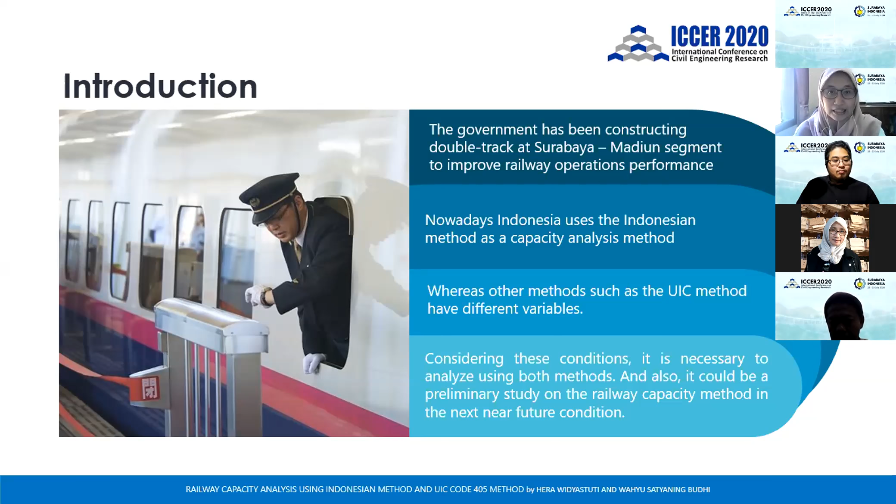So considering this condition, it is necessary to analyze using both methods, and also it could be a preliminary study on railway capacity methods in the near future, especially for the analytical method. So this is the objective of our study. The length of this segment is around 152 kilometers and consists of 23 stations, starting from Surabaya Gubeng station to Madiun station.

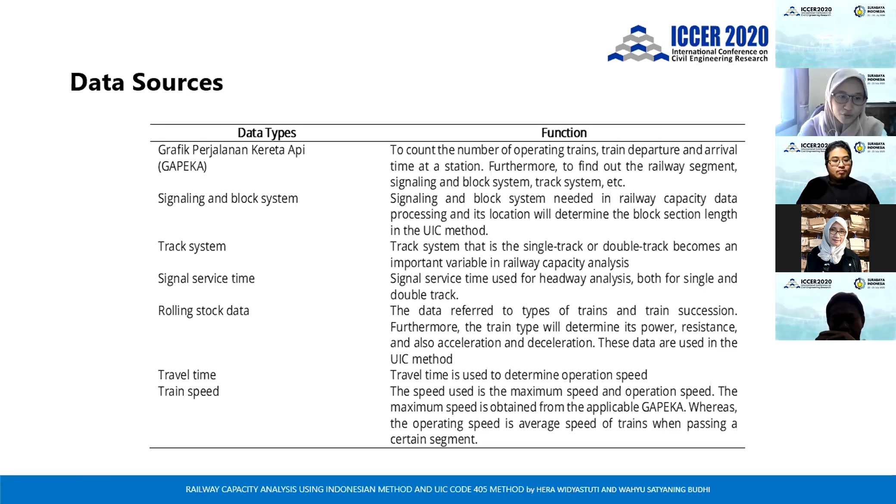So this is the data source, and the data used in this study is only secondary data. This secondary data was obtained from related institutions, including PT KAI, DAOP or Daerah Operasional 8 Surabaya and DAOP 7 Madiun. The detailed data can be seen in this table. There are GAPEKA, signaling and block system, track system, signal service time, rolling stock data, travel time, and train speed.

So in this study, theoretical and practical capacity analysis is carried out. Theoretical capacity is the number of operating trains during a certain time interval using maximum speed, and practical capacity is the actual traffic volume condition, which is calculated using realistic assumptions. There are cross and overtake situations.

So this is the first method that we use in our study. This is the Indonesian method. There are several variables. The first is total time, average headway, and the multiplier factor after deducting the time factor for maintenance due to the operating pattern of train travel. For a single track it is 60% and for double track it is 70%.

And the next variable is travel time on the track section. And other variables are travel time from the outer signal to the station, and signal and block service time. Equation 1 is a formulation that applies to a single track system, equation 2 is a formulation used for the double track system, while equation 3 is the headway calculation.

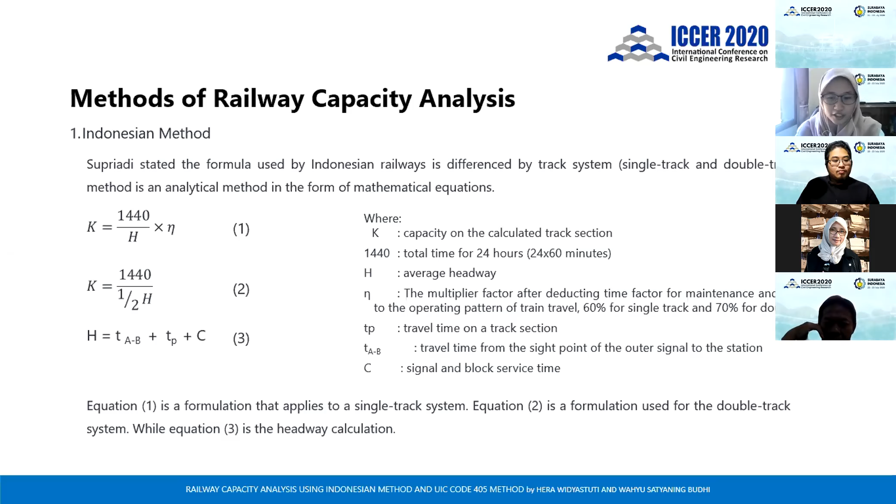The second method of our study is the UIC Code 405 method. There are variables: reference time, average minimum headway, additional time due to maintenance difference by its utilization, normal operation, and the applicable during peak hours. The next variable is additional time based on the number of intermediate blocks. Same as the Indonesian method, this method also requires headway to analyze railway capacity.

At single track system, headway will be affected by travel time, acceleration and deceleration times, and signal service time. Whereas in the double track system, the headway will be affected by block length, train length, signal service time, and also the speed.

So for the result and discussion, the analysis was performed on the existing condition with two assumptions: full single track condition which reflects GAPEKA 2017, and 50% double track condition which reflects GAPEKA 2019.

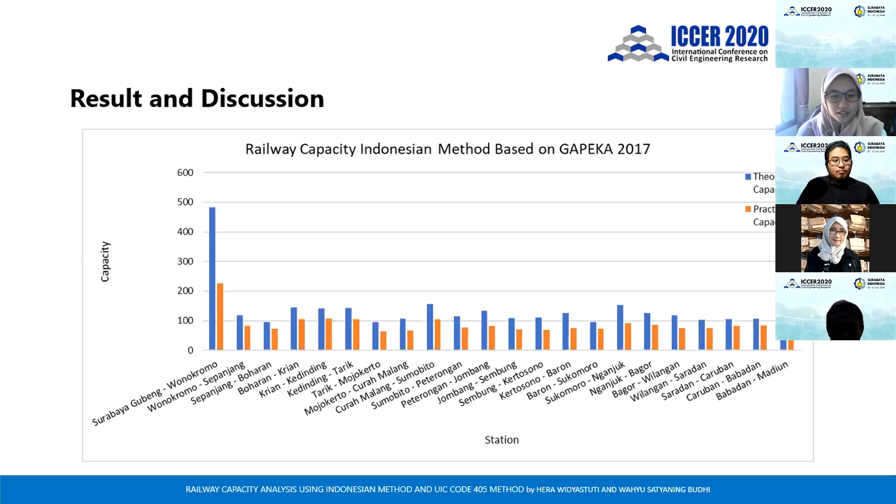This is the graph of railway capacity using the Indonesian method based on GAPEKA 2017. We can see that the largest capacity is located in the Surabaya Gubeng Wonokromo segment, and the average practical capacity for the Indonesian method is 89 trains per day.

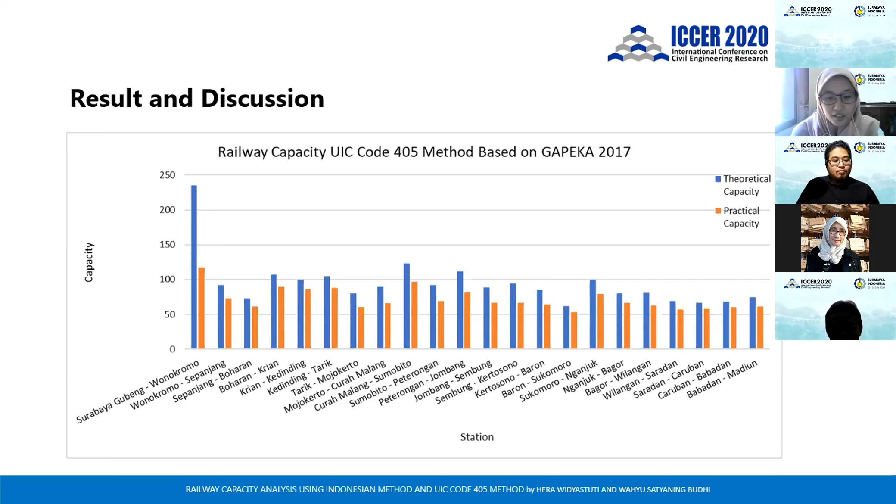This is the result of railway capacity analysis using the UIC code based on GAPEKA 2017. The largest capacity of this method is also located in the Surabaya Gubeng Wonokromo segment, and the average practical capacity is 73 trains per day.

The next is the second assumption with 50% double track, using the Indonesian method and based on GAPEKA 2019. The largest capacity is located in the Sukomoro Nganjuk Station segment, with the average practical capacity of 159 trains per day.

This is the result of railway capacity analysis using the UIC code based on GAPEKA 2019. There is also the largest capacity located in the Sukomoro Nganjuk Station segment, and the average practical capacity is 96 trains per day for the UIC code method.

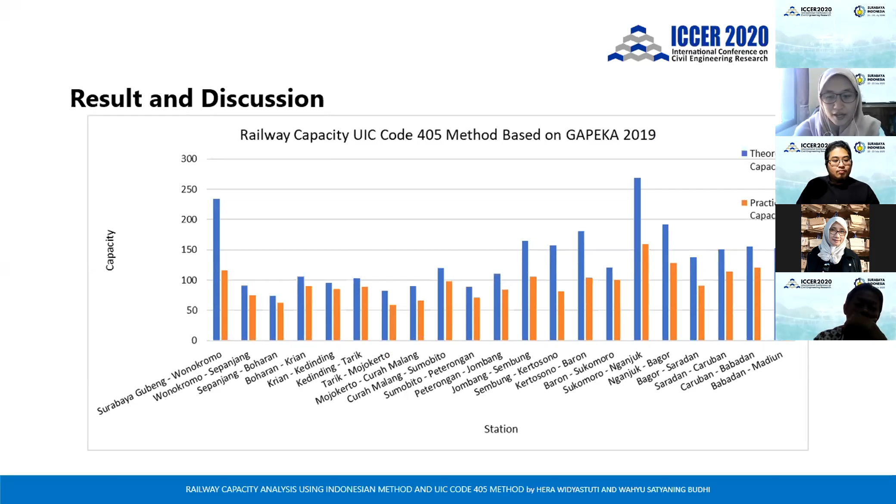Based on this graph, it can be known that there is a railway capacity increment in Jombang Madiun. This increment is due to the double track operation, and it's also caused by the replacement of the signaling block system. Moreover, it is affected by the Wilangan station that turns into an intermediate block.

So this is the conclusion. First, the result of railway capacity analysis using these two methods indicates an improvement in railway capacity because of double track construction in the Surabaya-Madiun segment. One of the different variables is additional time due to maintenance, which is different based on utilization.

Its utilization in the UIC method is different based on its operational condition, by peak and non-peak hours or normal. That may also affect the result.

Time is up. Can you go a bit faster, please?

Oh yes, ma'am. This study implies that the UIC method could be a relevant comparison method to the existing condition. However, it could be used as a preliminary study recommendation for policymakers to analyze capacity in the near future. Furthermore, regardless of which method will be applied in the near future, safety must be considered more.

And that's all. This is the end of our presentation.

This is basically the reason why our construction practice is not really considered eco-friendly, and therefore we need new technologies to make sure our practice is more sustainable and more environmentally friendly.

One approach is to perform warm mix asphalt, which is basically the normal mix but produced at a lower temperature, 100 to 140 degrees Celsius.

Several benefits are reduced fuel consumption, reduced energy consumption, and also better health exposure for the worker because of less heat and less carbon dioxide emission. We also have a longer window of compaction, so we can compact more in a day.

It's beneficial for us, but the performance of both types, warm mix and hot mix, remains our major concern. We still have cracking, problems with moisture damage, rutting, and permanent deformation.

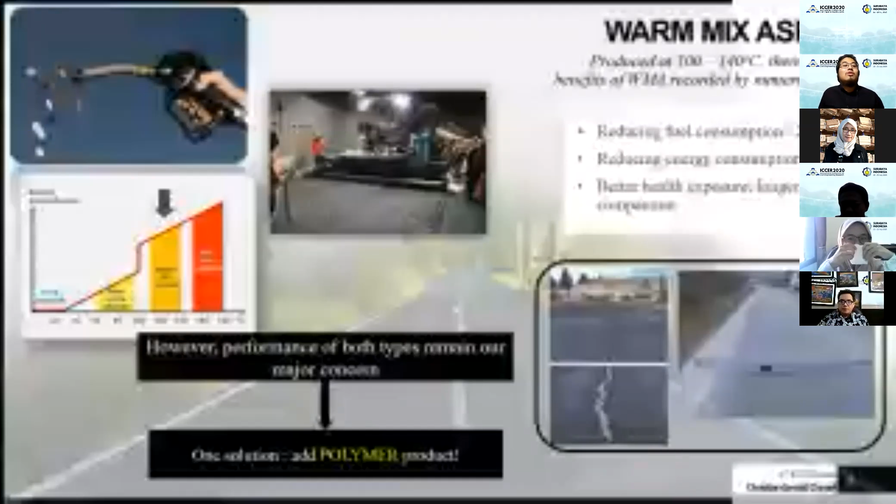One of the solutions, there are many for sure, is adding polymer to our asphalt. Among the most popular types of polymer, we have aramid, polyolefin, and PET. I will explain all of them now.

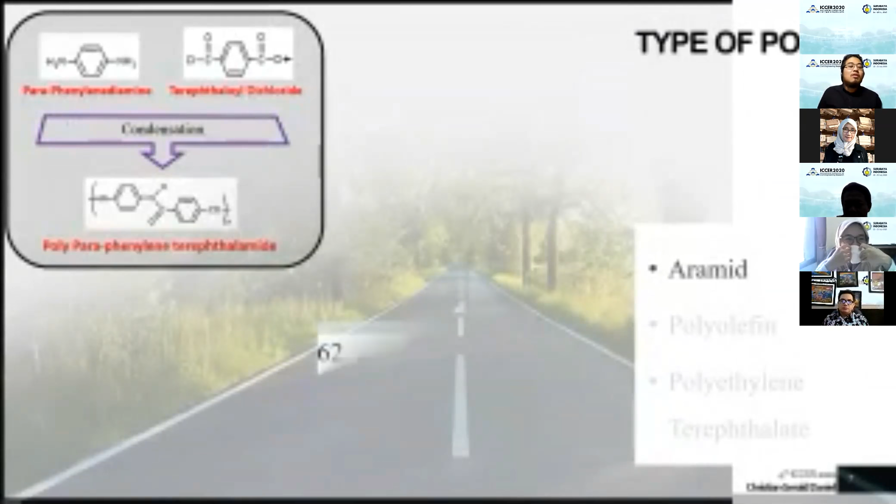For aramid, it's a result of a condensation process from two monomers. We can trace it back to the 1930s until now, under the brand Kevlar, the most notable one. These are several of its mechanical properties: it's insensitive to temperature, meaning it can really work in extreme temperatures, more than 200 degrees, for instance.

Moving to polyolefin, it's basically the normal plastic product that we use. We have polyethylene and polypropylene as branches of polyolefin. Within polyethylene itself, PE, we have high density, HDPE, and low density, LDPE. We can trace it back to the 19th century until now, and these are the characteristics of both LDPE, PE, and PP polymer.

The last one is PET. While it doesn't necessarily belong to the class of polyolefin, it shares the same monomer, ethylene glycol. That's why, and because it's also a really popular product we use nowadays, I include it within this paper.

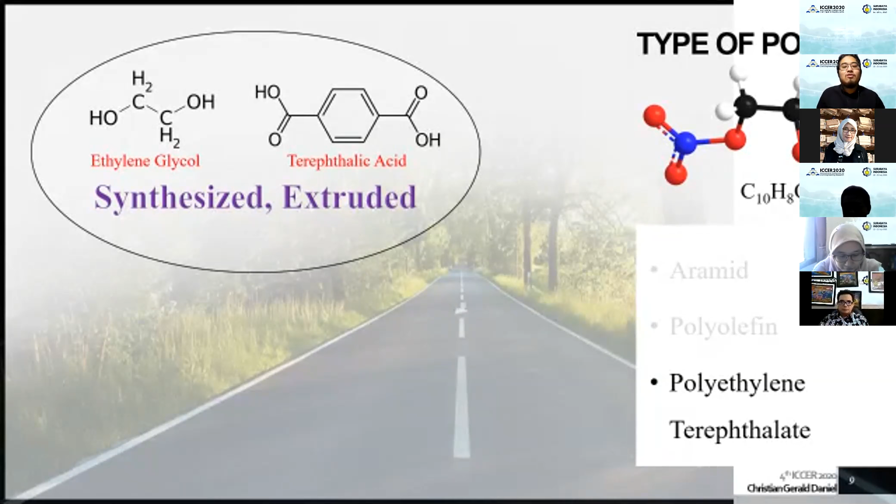We might know it with another name, not only PET but polyester. But the term polyester is mainly used in fashion products, whereas other industries use the term PET, or polyethylene terephthalate. These are its mechanical properties. And how do we include them within our mixture? We have wet and dry methods.

With the wet method, basically we create polymer modified bitumen, or PMB, whereas using the dry method, we could create either fiber reinforced mixture, or we could substitute the aggregate partially.

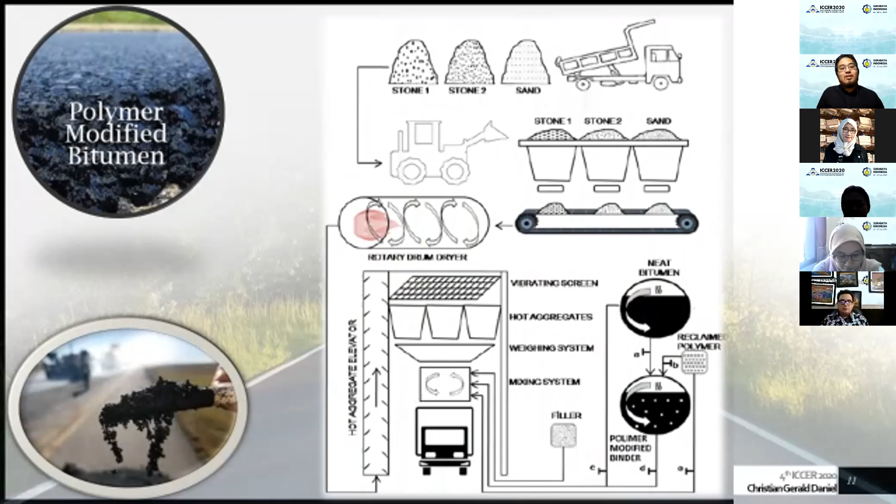This is the schematic. For the wet method, basically we have A, B, and D, which means that the neat bitumen will be mixed with reclaimed polymer, and then the modified bitumen will be mixed with aggregate. Whereas with the dry method, both are mixed simultaneously, so the bitumen isn't mixed with polymer first. The question is, what are the effects of both methods?

Let's dive into the wet method first. Using polyethylene and polypropylene, we can see that the penetration is decreased by more than 60%, or around 60%, by PE and PP respectively. Both indicate quite similar performance. Also with the softening point, PE modified bitumen is maybe more beneficial, but it's just a slight improvement, more than 50 and 40 to 50%.

And the effect of both modifications lasts up to only around 7% in both cases, beyond which the effect starts to deteriorate. You cannot really see the improvement anymore.

One thing to be taken into account is a phenomenon like this, polymer binder separation. The highlighted part is the polymer. It cannot disperse entirely inside our binder or bitumen because of the differences in density, and they don't have a really strong bonding, chemical bonding. That's why this could happen, and that's why we need to stir it constantly. It's not thermodynamically stable, but it is kinetically stable if we stir it constantly.

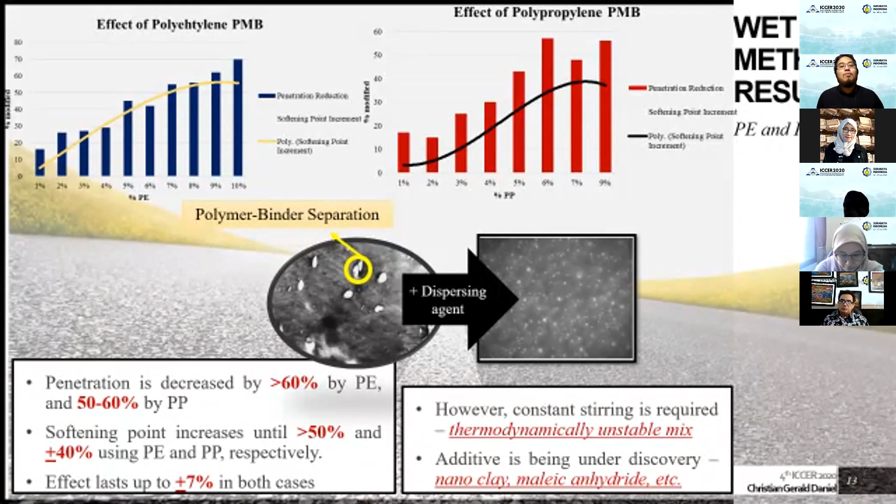To combat this, we have some additives such as nano clay, maleic anhydride, which is a polymer also, etc. But it's still not an affordable method, which is why the price of the PMB product is quite significantly higher than the other peers.

What about PET? Basically, they are the same also with stiffness and more tensile strength, reduced permanent deformation, and the effect lasts until 6%. So it's quite the same, 6 and 7%, within PET, PE, or PP as well. One more thing is there is an increase of moisture susceptibility for all the polymers, which indicates more risk of moisture damage.

What about the dry method now? I haven't mentioned aramid yet because it has a high melting temperature, which means it cannot just melt inside the bitumen using the wet method. So it reacts more as a mechanical reinforcement using the dry method.

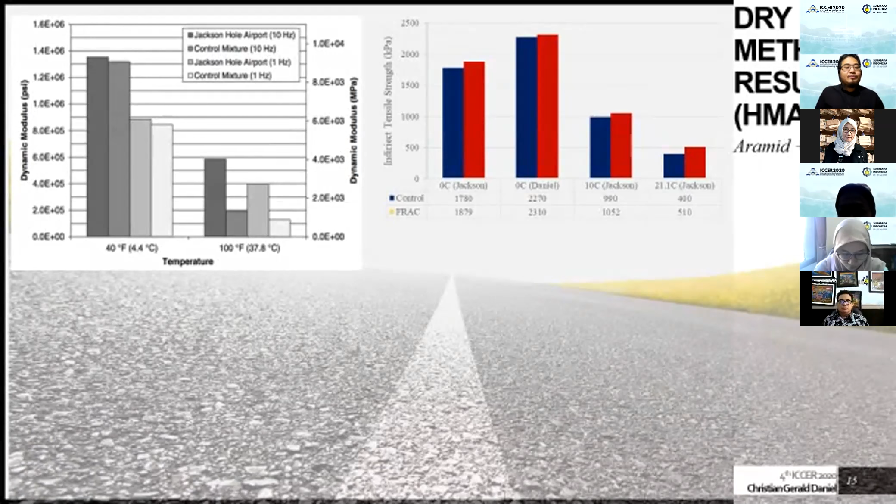By combining aramid and polyolefin, we could have something like this: stiffness and strength basically increase. The effect is more obvious at high frequency loading, indicating better performance maybe at high traffic. It is also more apparent at high temperature, where the bitumen becomes less viscous, so the fiber could react better than in the previous stage.

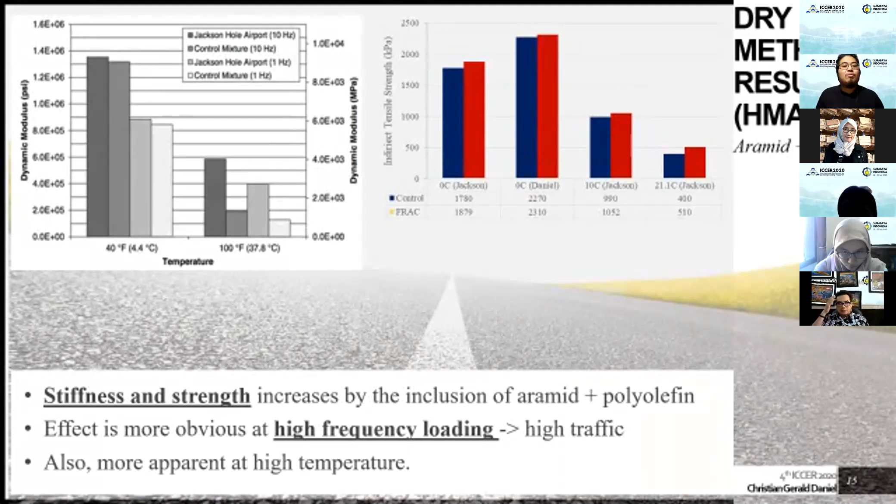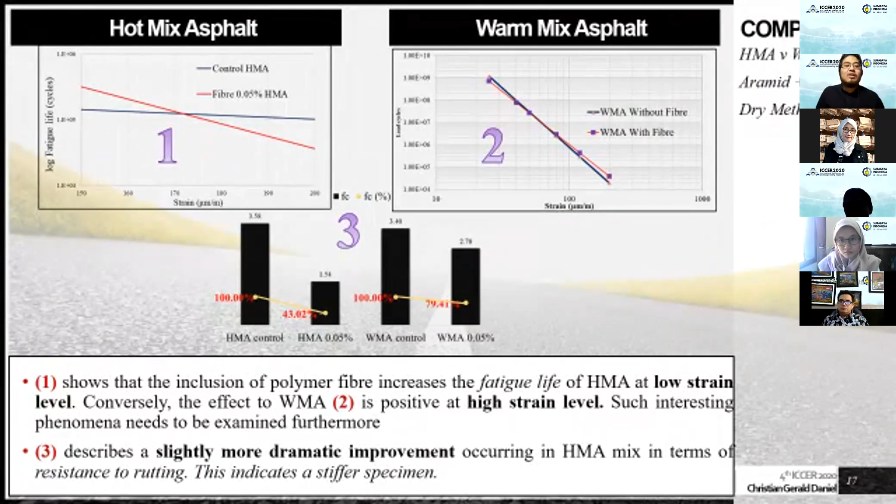If we try to compare the performance of reclaimed asphalt pavement, RAP, in hot mix and warm mix, the result is in contrast. You can see that the fatigue life of the mixture is increasing at high strain level for warm mix, whereas it was in contrast within the RAP hot mix asphalt.

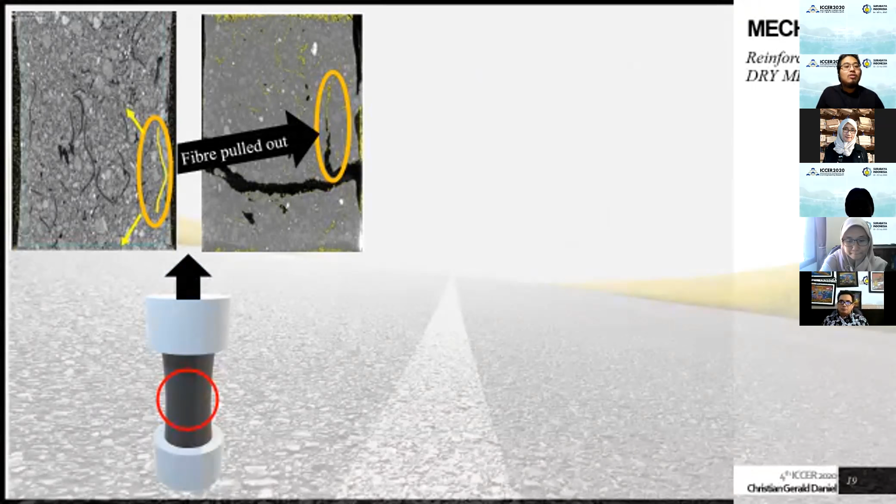This is the result of PET within the dry method. The more interesting part is the mechanism. Within the dry method, when we try to pull the sample and zoom in, we can see the fiber being pulled out, which means there is an interaction that is both temperature and frequency of load dependent. There is an interface bonding, both mechanical and chemical, between the fiber and the bitumen matrix. There is also load transfer thanks to the network of fibers between the fiber-matrix interface and another fiber. So those are basically the reinforcing mechanisms.

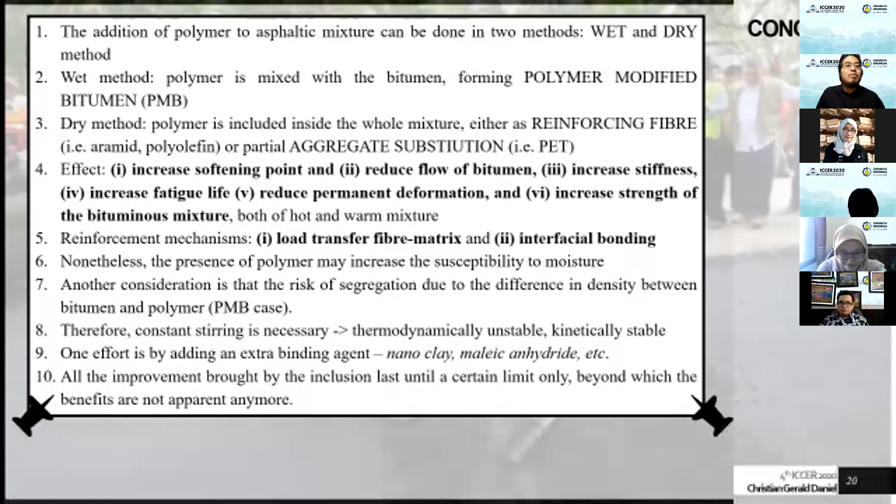These are the conclusions. With the wet method, we have polymer modified bitumen. With the dry method, we could have reinforcing fiber or partial aggregate substitution. The effects are to increase softening point, reduce flow of the bitumen, increase stiffness, fatigue life, and strength, and reduce rutting, basically an increase of stiffness in both hot and warm mixtures.

There is a risk of segregation in the PMB case due to the difference in density and the weak bonding between bitumen and polymer, therefore constant stirring is necessary, and it's thermodynamically unstable but kinetically stable. And also we could have binding agents or additives. And the most highlighted point is that the benefit lasts only until a certain limit, as we have seen, beyond which

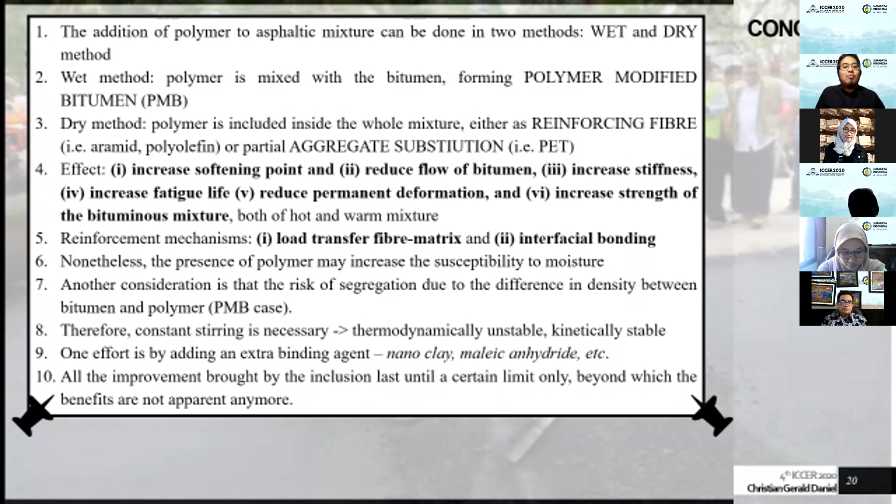Christian, time is up. Okay, is it quite many? Okay, great. Okay, sorry about that. It's okay. I'm done. Okay. So just

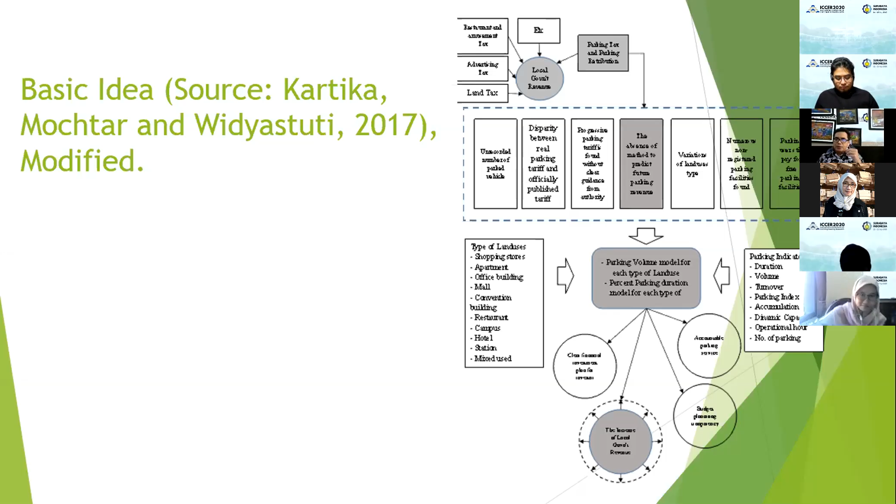So basically, we need to collect information regarding the volume and also the duration of the parked vehicles, because when we are applying the progressive tariff, we need the duration in order to get the tariff proportionally. This is the background of the study.

Firstly, there is a lack of methods for calculating parking, and also the absence of a system to estimate the potential parking revenue. Due to this, I can identify the factors that influence the potential parking revenue. The first is the real number of parked vehicles is not yet recorded entirely. Not all parking facilities in Surabaya are recorded; many are not registered yet.

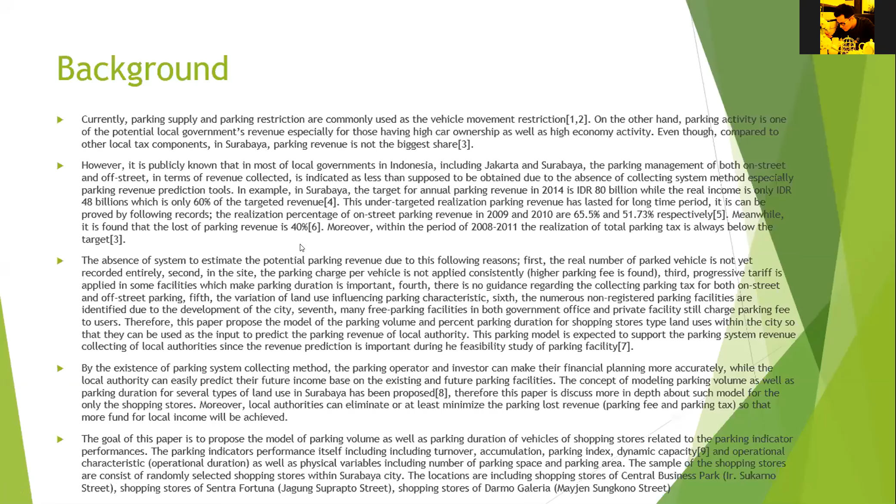Second, on site, the parking charge of vehicles is not applied consistently. In fact we experience the progressive tariff applied, while according to the regulation in Surabaya or many cities in Indonesia, there is no parking charge for the progressive tariff. So this is potential revenue for the city actually.

Third, the progressive tariff is applied in some facilities, which makes parking duration important. Fourth, there is no guidance regarding collecting parking tax for both on-street and off-street parking. Fifth is the variation of land use influencing the parking characteristics, because malls, hospitals, and education facilities will produce different parking characteristics.

Six, numbers of non-registered parking facilities are identified due to the development of the city. Seven, many free parking facilities in both government offices and private facilities still charge parking fees to all users. This can be found when we enter a parking facility that should be free, but in fact we still pay. This is beyond the supervision of the parking authorities.

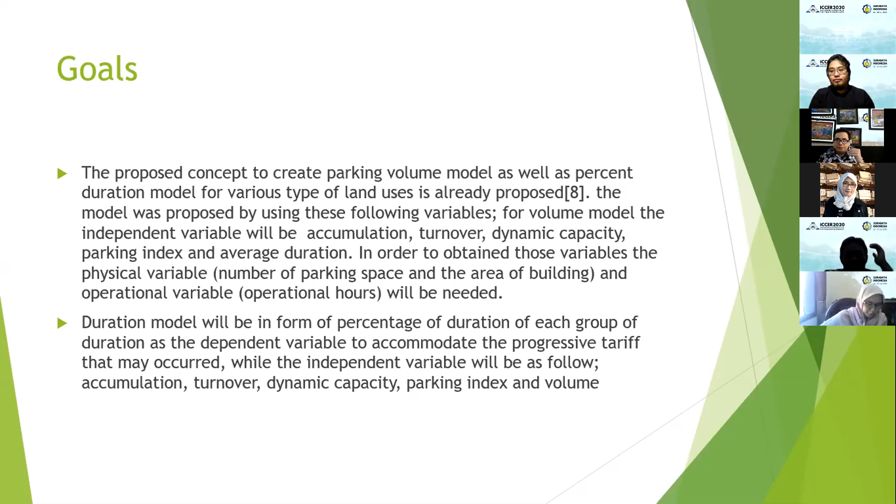And then we are doing the regression test. Your time only lasts 3 minutes, so okay, would you please be faster?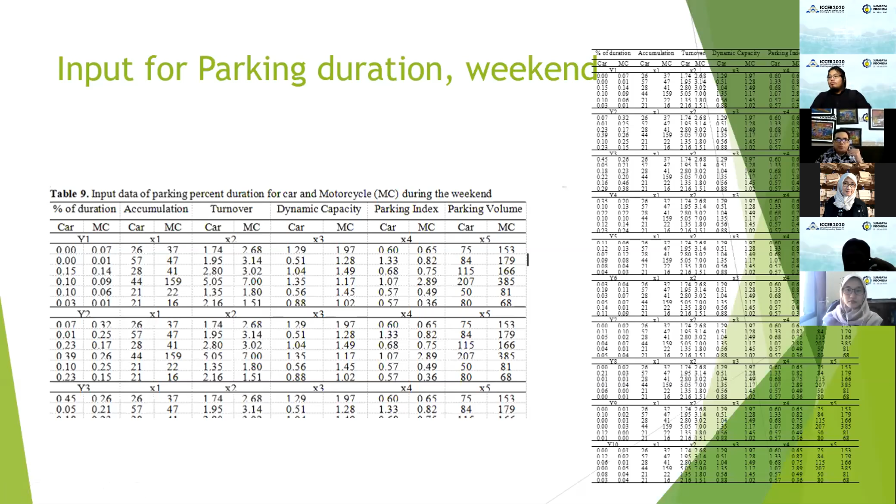And then this one is input for parking duration; it's a little bit messy here. Okay, this one is zoomed. So this is also divided into two types of vehicle, in this case car and motorcycle, and also divided into 2 types of days, which is weekday and weekend.

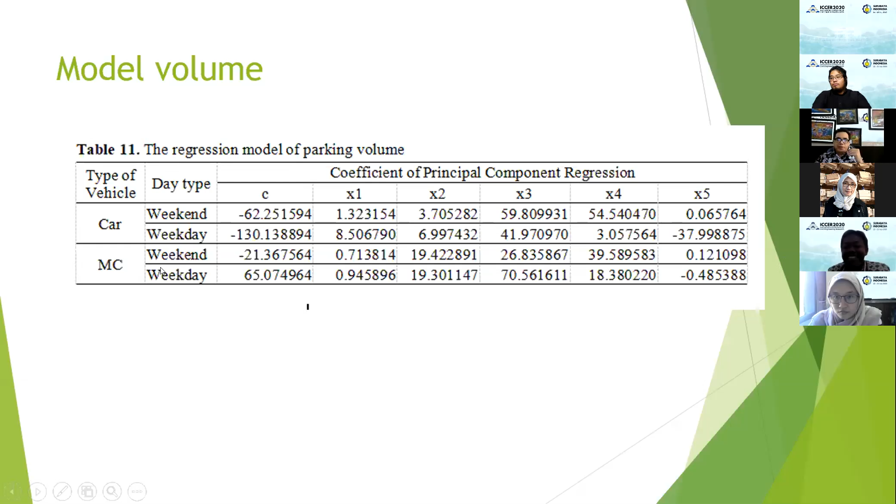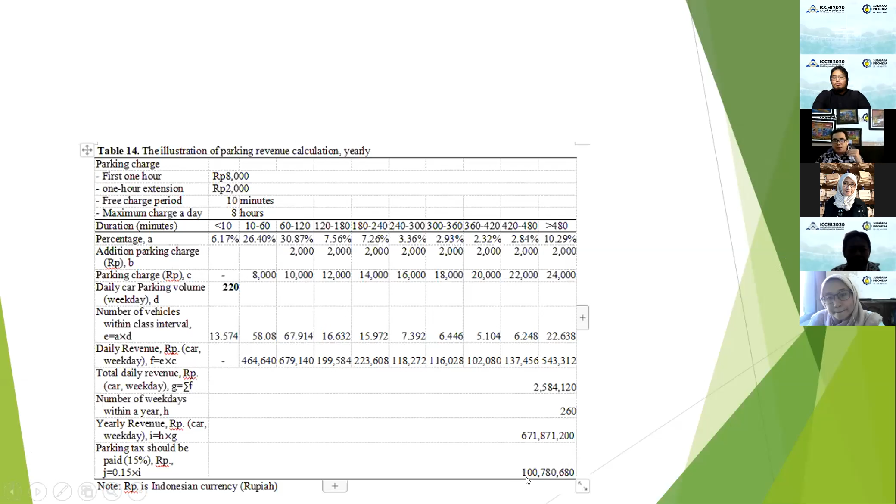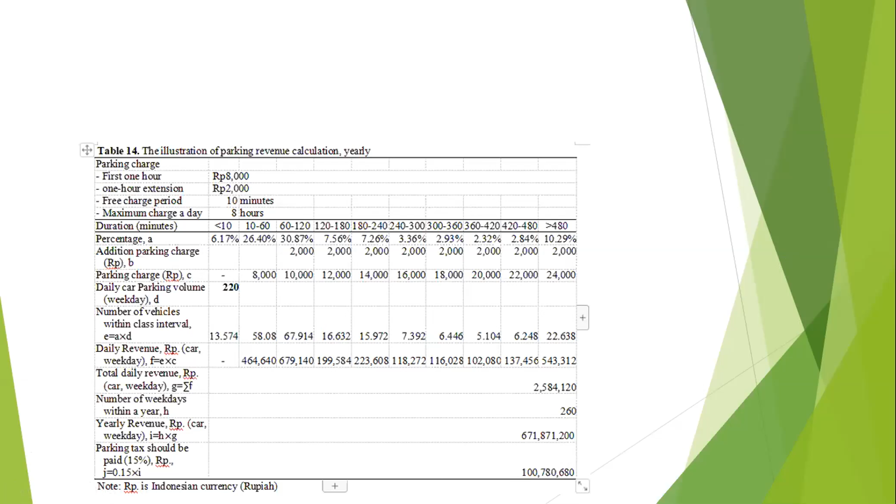Okay, this is the illustration for the utilization of the model. Suppose we have 220 vehicles. So the tax that must be paid to the government in a year will cover 100 million. This is only for car and only for weekdays. So we can calculate for weekend and other vehicles. Thank you.

Thank you, Kartika. And then would you please close your presentation paper, please? Yeah. And then now the fourth person is Romainur. Is there any Romainur or Huzaini or Isha? Anyone? Okay, which means they haven't arrived yet.

Okay, and then continuing with Puspita Dewi with ID number 136 and paper title Intercity Dwell Time Estimation by Using Robust Regression Method. Are you ready, Puspita? I'm ready. Okay, now it's your turn, 10 minutes. We will inform you when 3 minutes are left and 1 minute left. Okay. Thank you for the time.

Good afternoon, everybody. My name is Puspita Dewi. I'm a master's student at Institut Teknologi Sepuluh Nopember in the Civil Engineering Department. Today, I will present my research paper about intercity train dwell time estimation by using robust regression method. First, I would like to tell you why we need to estimate the dwell time. Dwell time is an important issue not only for train efficiency but also punctuality. Dwell time is an essential issue in train scheduling.

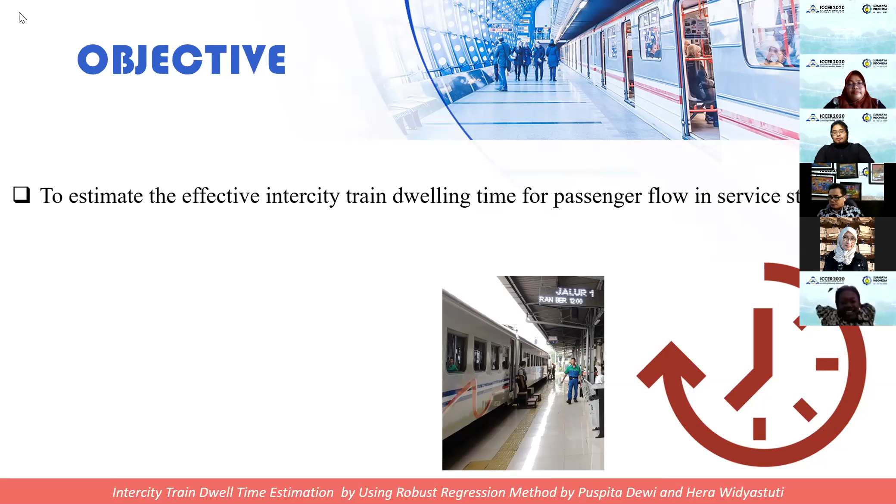Data collection. We use two types of data here. The first one is secondary data from Daop 8 Surabaya, the regional office of PT KAI for the Surabaya–Yogyakarta line. The data from Daop 8 Surabaya is passenger data and current dwell time for the Surabaya to Yogyakarta line. And for the primary data, we collect the number of doors on one side of the train set, and the type of platform for each station, and we count the dwell time at each stop station with a stopwatch.

We use this type of form for onboard observation. In the second column, we wrote the type of platform. There are three types of platform: low level platform, mid level platform, and high level platform. And for the boarding and alighting persons, we collect data from the onboard officer, updated by Daop 8 Surabaya.

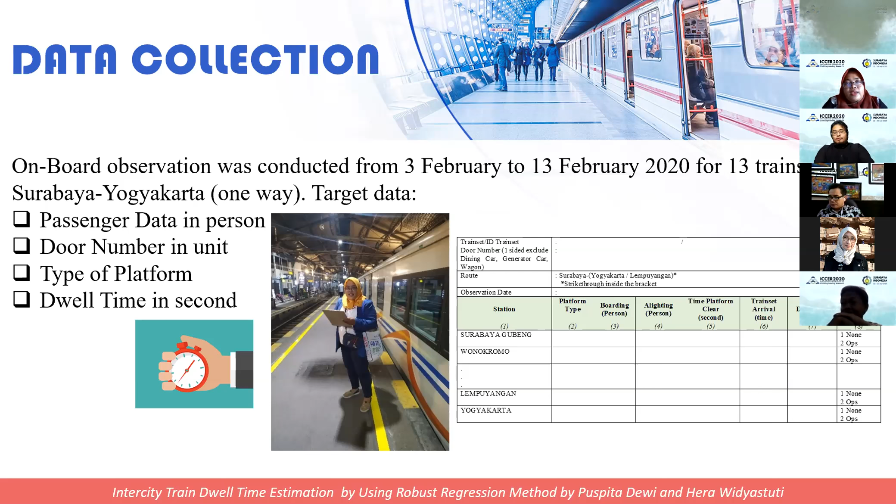For data analysis, to estimate the model, firstly I use ordinary least squares, and I conducted tests for the OLS for linearity, normality, heteroscedasticity, and multicollinearity. And I identify the outliers and the influential data with the leverage, Cook's distance, and the DFFITS. After some tests, we got that the data violates the assumptions. So we use robust regression here.

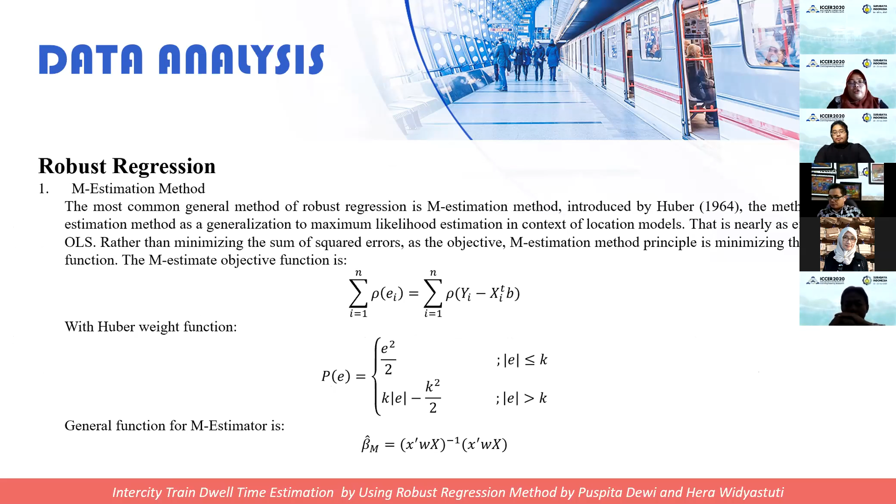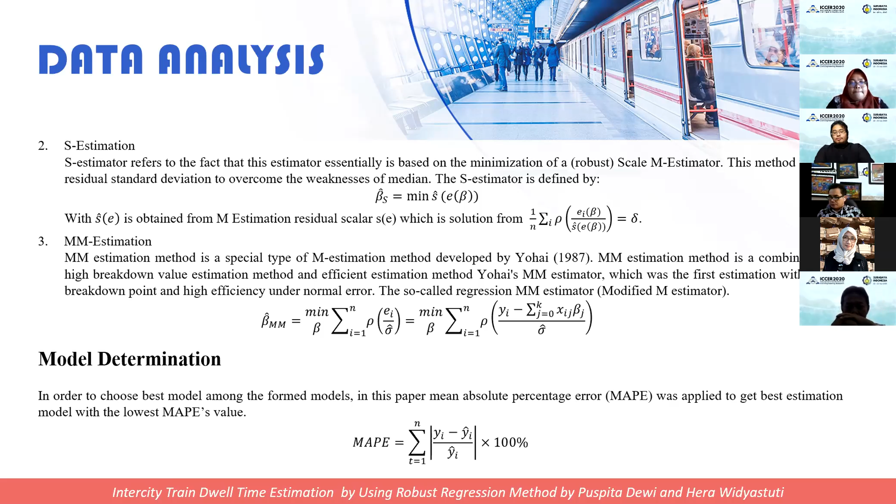We use the M estimation method with the Huber weight function, S estimation, and MM estimation. To determine the model, we choose mean absolute percentage error as a parameter for each model. The results for all of the statistical calculations are output with Stata version 16.

In here, we can see that the door number of trainset in the Surabaya and Yogyakarta line is minimum 12 door units and maximum 18 units, excluding the doors in the dining car, wagon, and generator car. For the boarding passengers, we get 0 passengers boarding minimum, and maximum we get 386 passengers boarding from the station. And for the alighting, we get 0, and for the maximum we get 493 passengers.

Three minutes left, Puspita. Yeah. Would you go a bit faster?

Yes. Because the platform is qualitative data, we use dummy variables: low level platform, mid level platform, and high level platform, with the low level platform as the base. The result is the correlation matrix. We get that boarding or alighting and type of platform significantly influence the dwell time. For the normality test, we get that it's not normal, with the probability of Z below 5% error. And here we got that the data is not homogeneous from the heteroscedasticity test, and the multicollinearity test is good. We can ignore the dummy variable here.

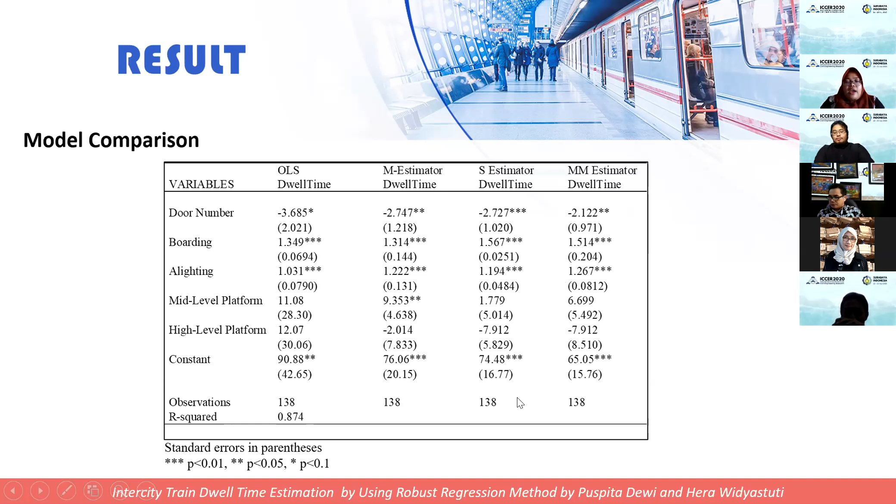And when the model is applied, we got the saving per transit here. There are 18 minutes of saving time for Argo Wilis and 23 minutes for Sancaka.

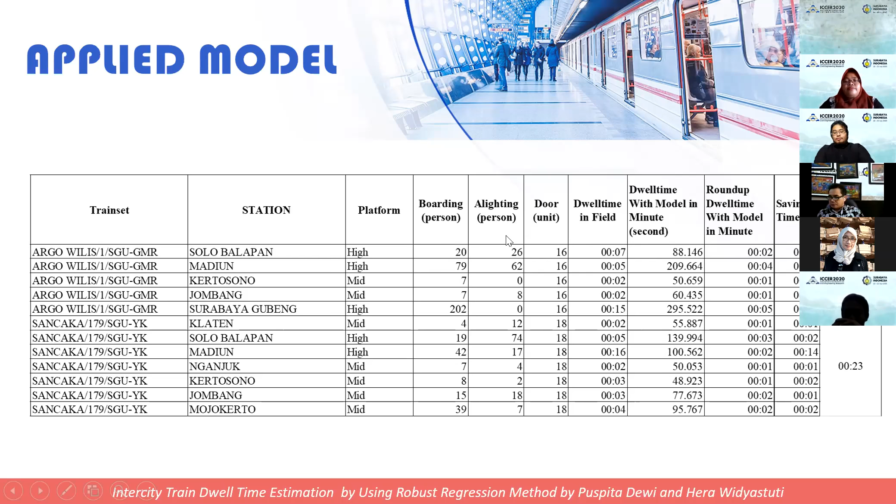Discussion. The dwell time study on Surabaya-Yogyakarta line transit estimation using a statistical approach has resulted in a model with the robust regression method, due to violation of OLS assumptions on heteroscedasticity and normality tests. In addition, outliers and leverage were present. With 2.04 mean absolute percentage error, robust regression with M estimation is taken as the dwell time method in this paper.

Based on the model, passengers alighting need less time than boarding. By using a high-level platform in the station, dwell time will be reduced by 2.01 seconds. And there are unpredicted factors which affect dwell time by 76.06 seconds. Using this dwell time model for Argo Wilis and Sancaka Pagi data, when the observation was conducted, the dwell time in the station can be reduced by 21 minutes for Argo and 23 minutes for Sancaka Pagi.

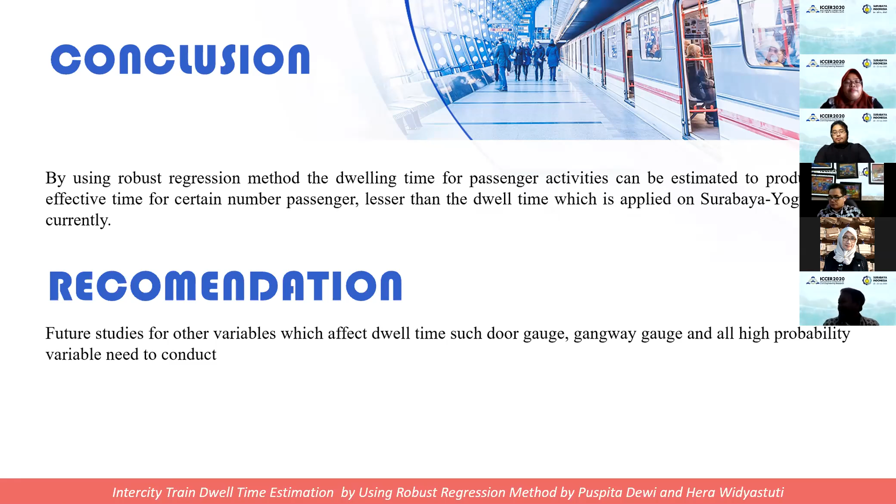Conclusion: by using the robust regression method, the dwelling time for passenger activity can be estimated to produce an effective time for a certain number of passengers, less than the dwell time currently applied on Surabaya-Yogyakarta. Recommendation: future studies on other variables which affect dwell time, such as door gauge, gangway gauge, and all high-probability variables, need to be conducted. Thank you for the opportunity.

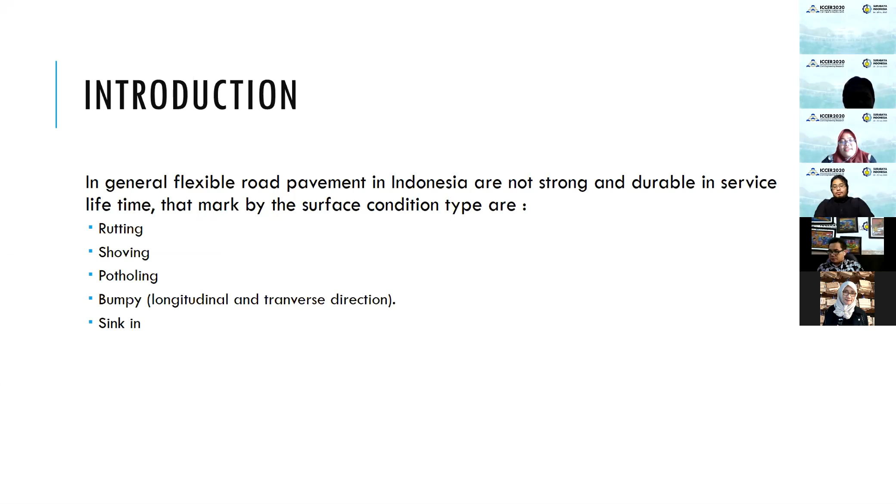There are three road damage criteria. One, rutting. Rutting is caused by excessive asphalt film thickness. Usually a film thickness between 9 and 12 micron is okay, but above 12 micron rutting will occur. Second, too large a volume of the fine aggregate portion. For the three types of surface pavement, AC-WC, AC-BC and AC-Base, the wearing course usually uses more than 50% fine aggregate, so it is very weak, and the maximum Marshall stability is not more than 1,000 kilograms.

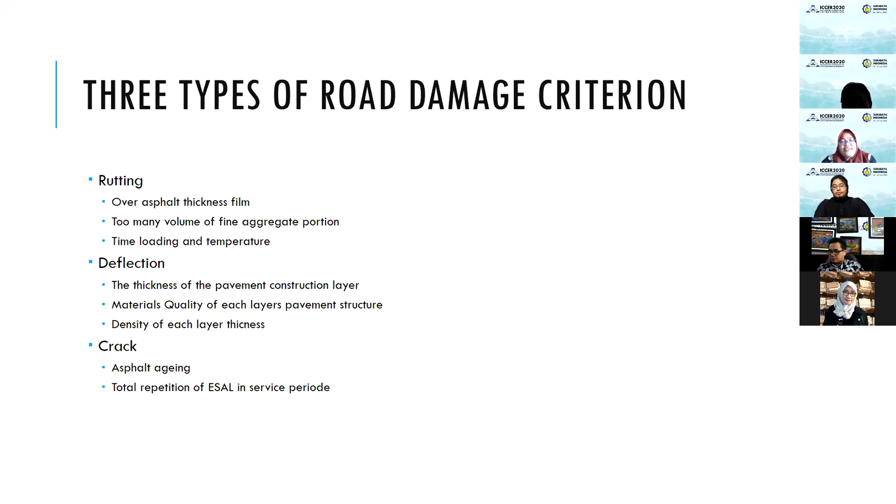How to avoid or minimize road damage? One, provide a layer stabilizer. Second, provide single-layer subbase, base and surface. And third, provide an asphalt surface that is resistant to rutting and bleeding.

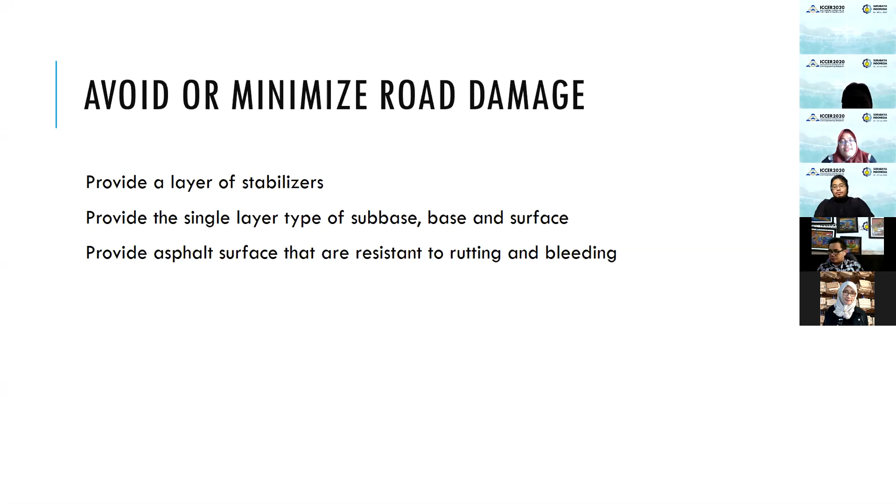A layer stabilizer is a 20 centimeter thick sand layer, to anticipate vertical movement of the subgrade due to its development, particularly for expansive soil subgrade, and second, to control heavy traffic loads that tend to be excessive. The sand layer easily adjusts its shape to the direction of the load acting on it; in other words, sand is able to neutralize several types of load. The load pressure becomes very small through the thick sand layer, so it acts as a layer stabilizer.

The criteria of the sand layer are: one, loose unit weight of at least 1.2 ton per cubic meter. Second, sand equivalent value of at least 50%, and passing number 200 sieve maximum 10%. As much as possible, there is no clay in the sand layer.

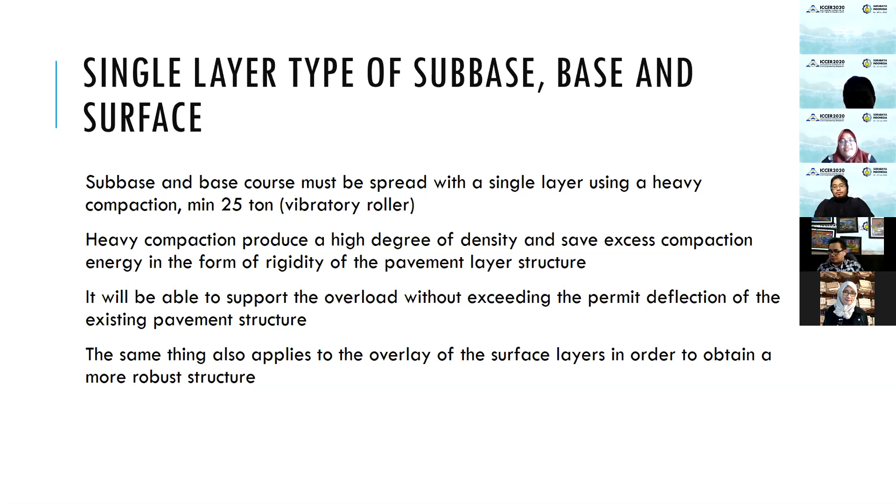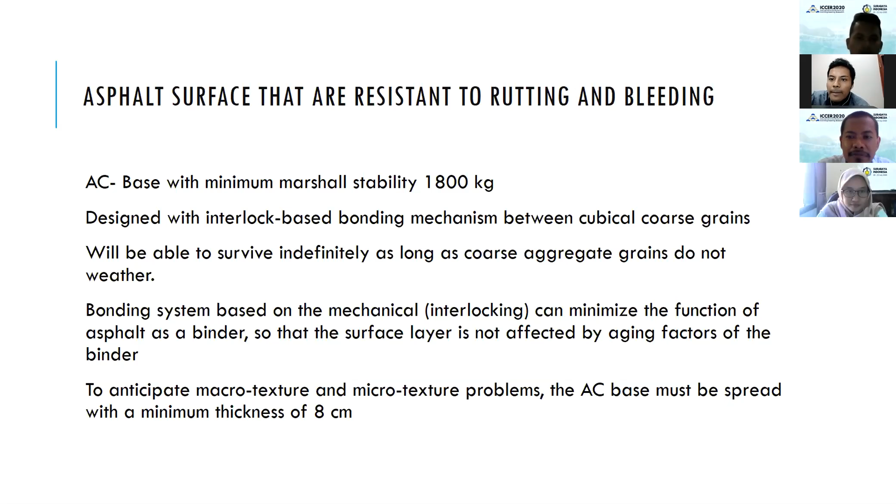The third must be provided asphalt surface that are resistant to rutting and bleeding. Asphalt concrete base with minimum Marshall stability 1,800 kilogram. Designed with interlock-based bonding mechanism between cubical coarse grain, it will be able to survive indefinitely as long as coarse aggregate grain do not weather. Bonding system based on the mechanical interlocking can minimize the function of the asphalt as a binder, so that the surface layer is not affected by aging factor of the binder.

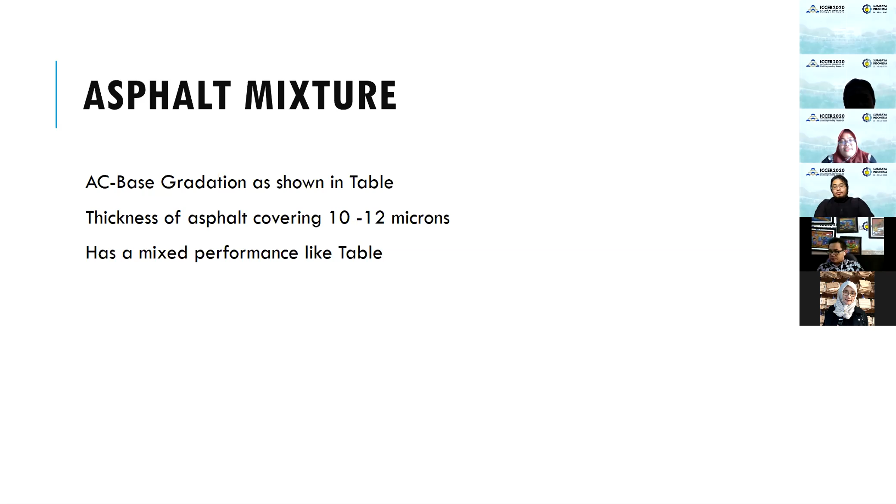To anticipate macro texture and micro texture problem, the asphalt concrete base must be spread with a minimum thickness of 8 centimeter. In this investigation, we try 15 centimeter. The asphalt mixture, asphalt concrete base gradation, is as shown in the table below. Thickness of asphalt covering must be 10 until 12 micron. The mix has performance like the table below.

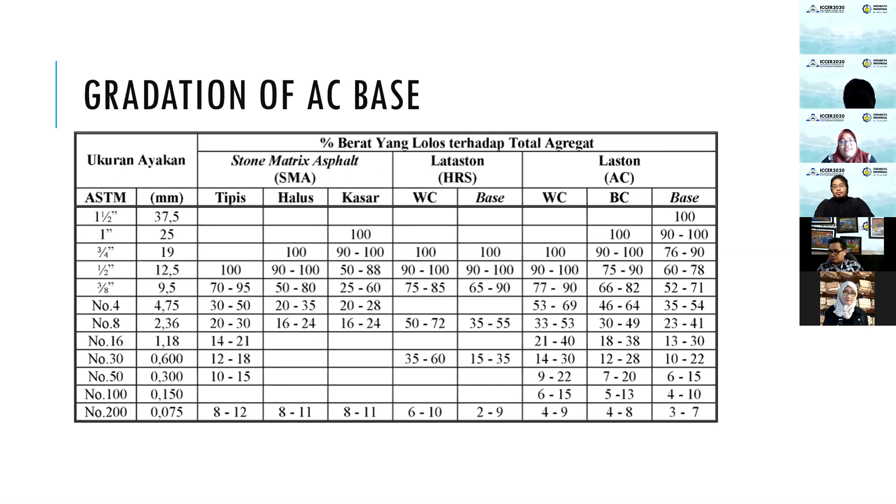This is gradation of asphalt concrete base like that. The last one, AC base. The maximum size is 37.5 millimeter, like this. The properties of AC asphalt concrete base.

The volume of void in the mixture, asphalt concrete base and asphalt wearing course, also binder course, is the same, minimum 3%, maximum 5%. So all the types of the surface course, wearing course until base course have the same void. Marshall stability minimum is 1,800 kilogram. So that is properties of the AC base.

The design structure of strong and durable flexible pavement uses the single layer of asphalt concrete base 15 centimeter, cement treated base 30 centimeter, subbase 30 centimeter. This is geotextile below the sand, upper the subgrade. This must be changed here, below the sand. The sand as a stabilizer.

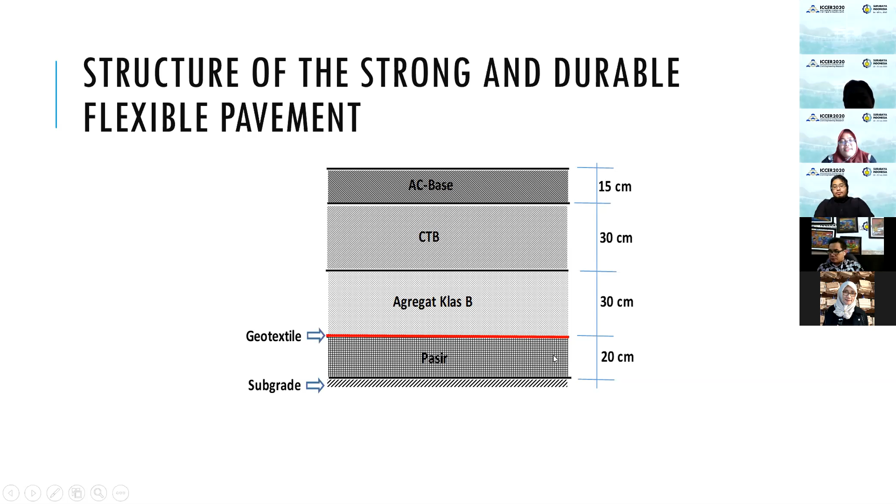Okay. The sand will act as a stabilizer layer at 20 cm. Conclusion, the accumulation of the three strengths of the pavement structure as analyzed above can be referred to as excess energy stored in flexible pavement system in the form of stiffness, and will work when the load exceeds the plan, so as to be able to provide service according to the design age with small maintenance costs.

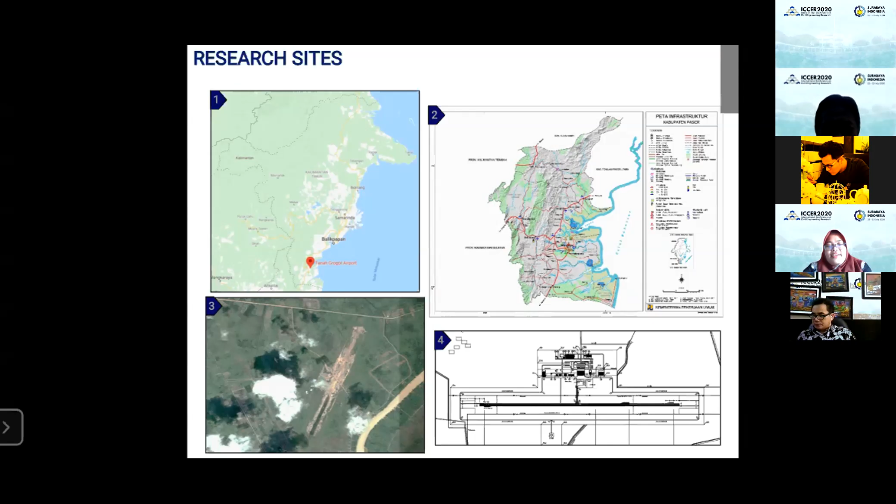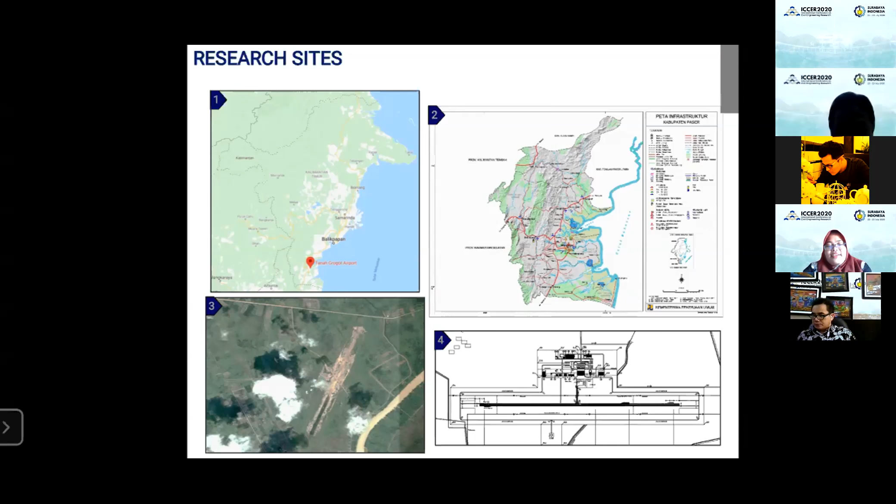And then in the second figure, it can be seen that Paser Regency is located in the southernmost part of East Kalimantan province. Then in the third figure is a look at this airport through Google satellite imagery. Then the fourth figure shows the detailed layout of the airport itself. Okay, this is my research background.

The first one is about travel time. During this time, the people of Paser Regency have to take a long time to travel between regions. To make the trip, they can only use land transportation such as cars, motorcycles, and buses. Moreover, if they have to travel outside the island, such as Java Island, the people of Paser Regency are required to go to the nearest airport first, which requires a very long travel time.

For example, the travel time to get to Balikpapan is around 5 hours, and to get to Banjarmasin is around 9 hours. This shows the first factor. The second is about airport competition: with so many airports in East Kalimantan and the distance or coverage of service so close together, it will share demand with the other airports around it. This affects the airline's possibility to assign flights to each airport by considering the characteristics of each airport and the demand patterns.

Therefore, the development of Tanah Grogot Airport also needs to consider air travel from the surrounding area, neighboring regions, and the nearest airport. The third factor is about economic and tourism sectors. The presence of this airport is expected to support the growth and improvement of these sectors in Paser Regency, increasing tourists as well as entrepreneurs or business people coming for activities in the Paser district. If foreign tourists want to travel faster, they can use the airport. Both sectors have a large influence on the demand obtained for this Tanah Grogot Airport.

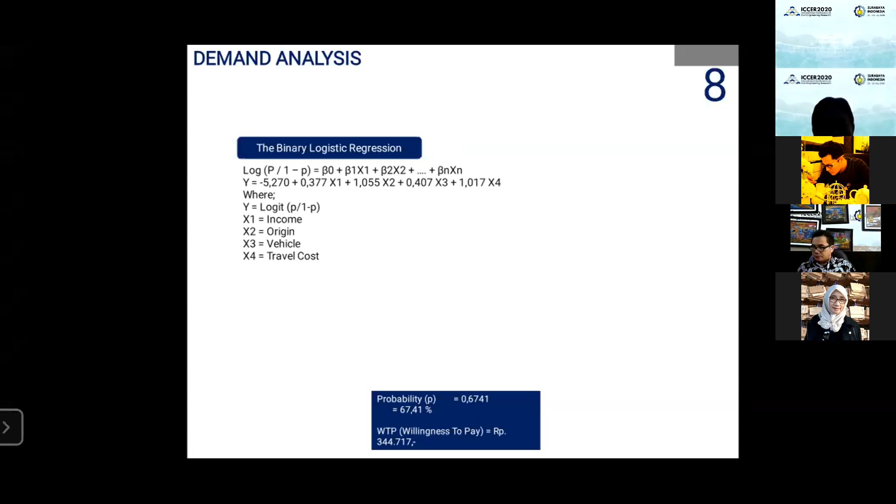Sorry, I have a presentation error.

And then the conclusion: the development of Tanah Grogot Airport has an influence on the accessibility of regional air transportation to the surrounding airports. Before the existence of this airport, the value of regional air transportation accessibility in East Kalimantan province was 684.016. With the Tanah Grogot Airport, the accessibility value has increased by 7.62%, to a value of 736.134. This means the development of Tanah Grogot Airport has the potential to increase regional accessibility in terms of land and air accessibility in the East Kalimantan region.

Second, from the interview survey results analyzed using binary logistic regression statistics, the results obtained show the probability of transfer of demand from the existing airport to Tanah Grogot Airport amounted to 67.41%. Variables that affect this include the level of income, the origin of the trip, the vehicle commonly used, and the cost of travel.

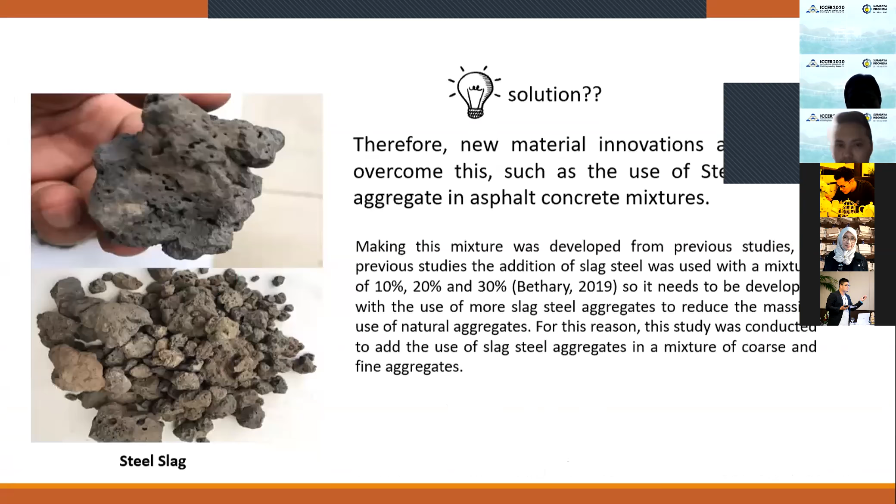Solution: new material innovation is needed to overcome this, such as the use of steel slag as an aggregate in asphalt mixture. This mixture was developed from previous studies, where the addition of steel slag was used with a mixture of 10%, 20%, and 30%, based on research from 2019. So it needs to be developed further with the use of more slag steel aggregate to reduce the massive use of natural aggregate. For this reason, the study was conducted to add the use of steel slag aggregate in a mixture of coarse and fine aggregate.

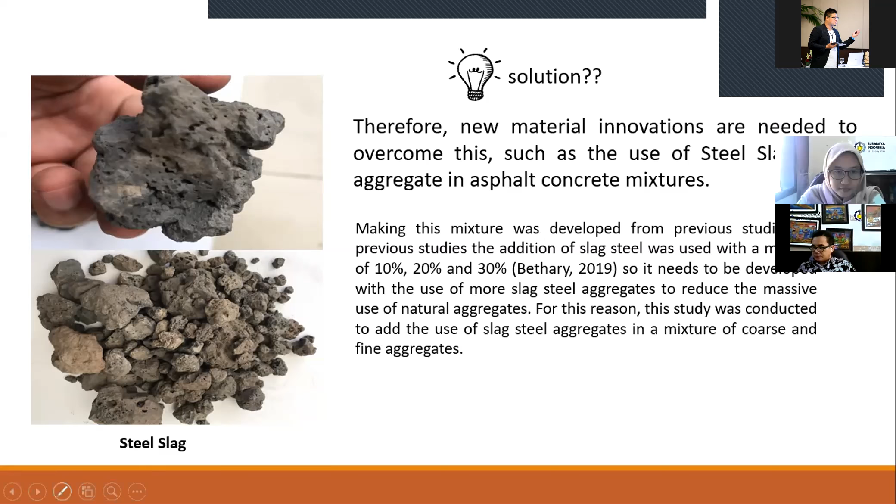Steel slag is included in the waste of dangerous and toxic material. In 2019, Indonesia produced 40,000 tons of slag waste from the steel refining industry. Therefore, the handling of this waste must be done immediately. One method for recycling this waste and preserving natural aggregate sources, by considering the concept of sustainable development, is to use it in road construction.

Research purpose: the study aimed to develop a research framework to gain more understanding of steel slag aggregate, to replace the use of natural aggregate.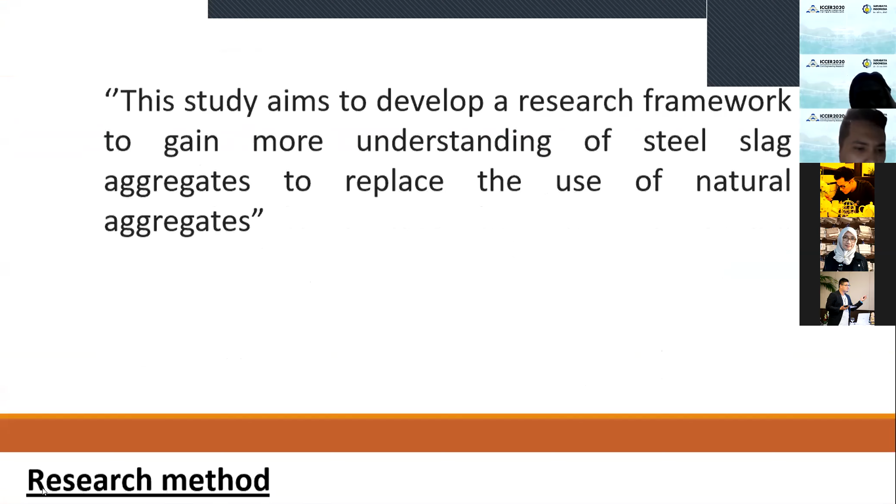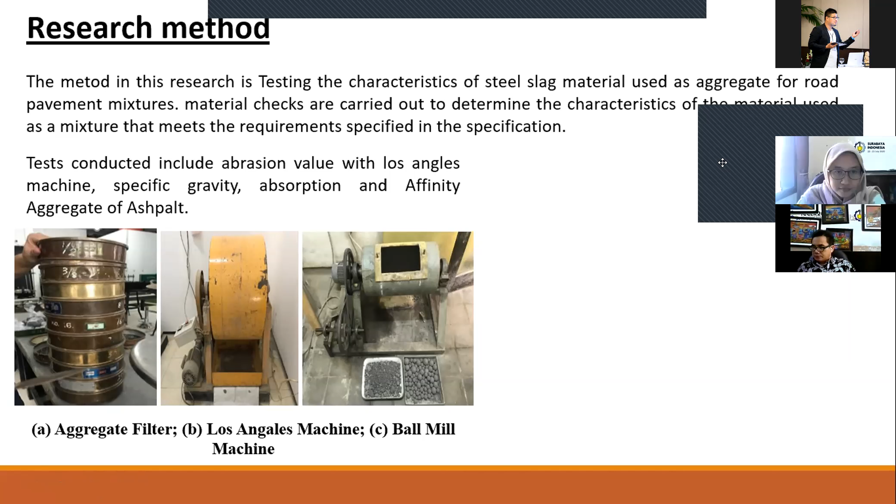Research method: the method in the research is testing the characteristics of steel slag material used as aggregate for road pavement mixture. Material checks are carried out to determine the characteristics of material used in a mixture that meets pavement specifications. Tests conducted include abrasion value with Los Angeles machine, specific gravity, absorption, and affinity aggregate of asphalt.

In this research method, the prepared aggregate is then mixed with asphalt using the Marshall method following the 2018 Bina Marga specification. Asphalt mixture versions in this study are: version 1, 100% natural aggregate; version 2, 50% slag aggregate and 50% natural aggregate; version 3, 80% slag aggregate and 20% natural aggregate; version 4, 100% slag steel aggregate.

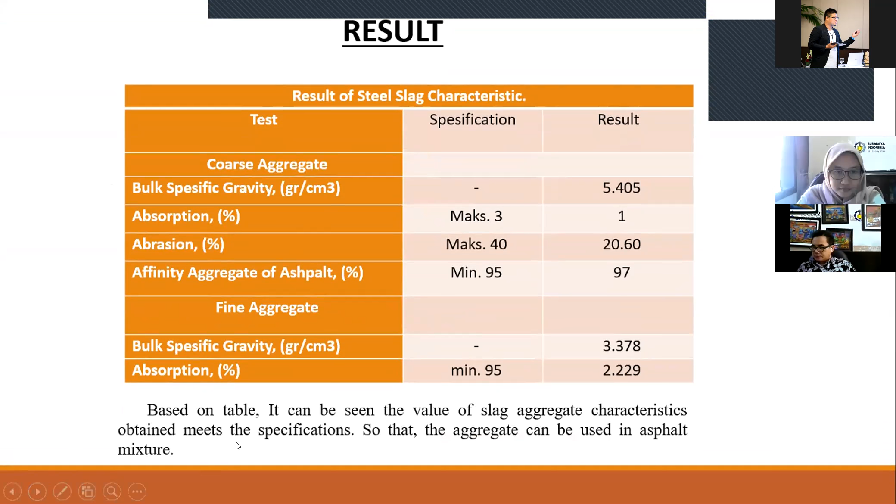This is the result of the steel slag characteristic test. Based on the table, it can be seen that the value of slag aggregate characteristics obtained meets the specification, so the aggregate can be used in asphalt mixture.

After KAO is obtained, testing is carried out on the specimen using optimum asphalt content, then Marshall tests are performed.

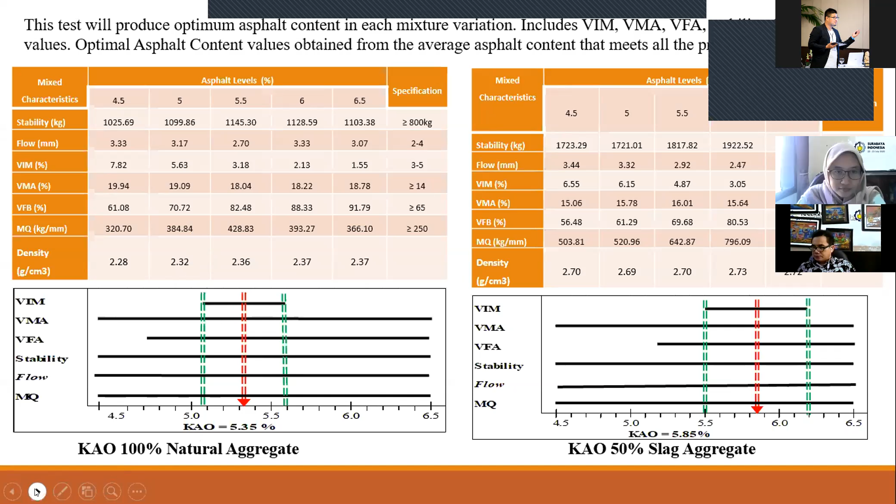This is the value of KAO for variations 1, 2, 3, and 4. In the table it can be seen the optimal asphalt content values in variations 1, 2, and 3 have met the specified specification. However, for variation 4, the optimum asphalt content cannot be determined because the VIM and VFA values cannot meet the 2018 Bina Marga specification.

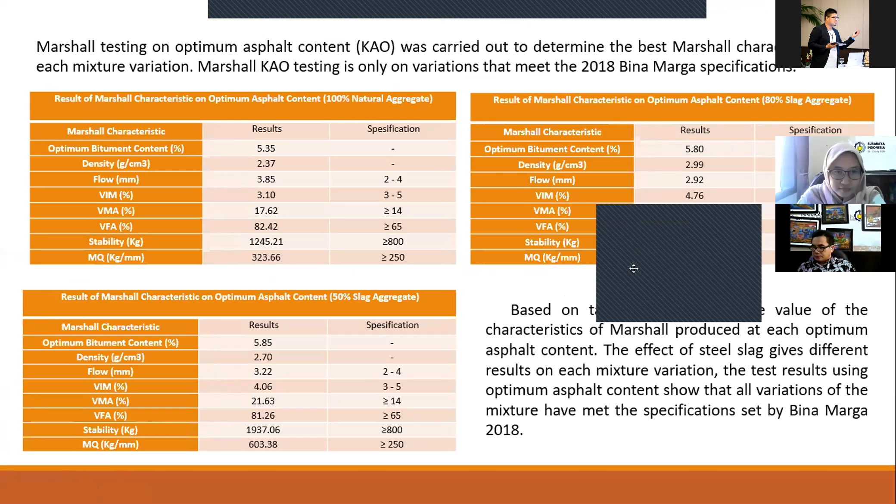After KAO is obtained, testing is carried out on the specimen using optimal asphalt content, then Marshall tests are performed. Marshall testing on optimal asphalt content was carried out to determine the best Marshall characteristics in each mixture variation. Marshall KAO testing is only on the variations that meet the 2018 Bina Marga specification. Based on the table, we can see the value of the Marshall characteristics produced at its optimum asphalt content.

The effect of steel slag gives different results in its mixture variations. The test results using optimum asphalt content show that all variations of the mixture have met the specification set by Bina Marga 2018.

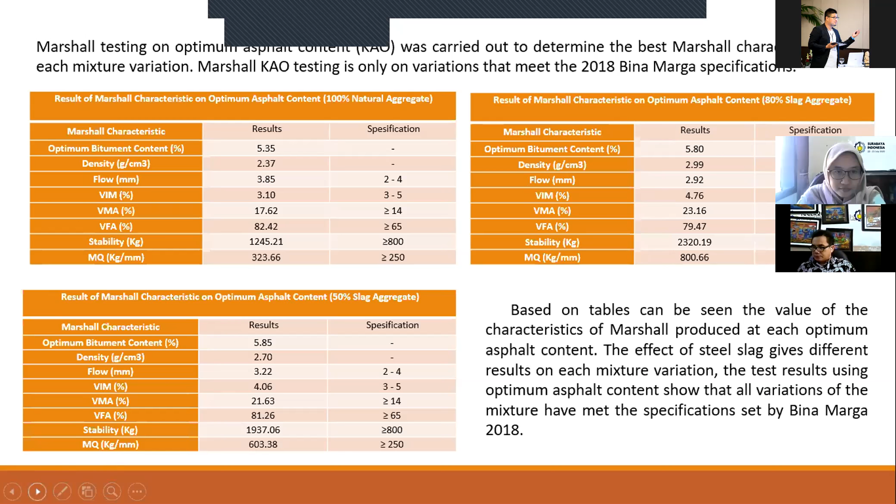This Marshall test analyzes the impact of slag on stability value. The use of steel slag as a mixture in pavement tends to increase the value of stability. It can be seen in the figure that the highest stability is found in an 80% slag steel mixture, at 2320.19 kilograms. It can be seen that the stability values in its variations still meet the minimum limit of 800 kilograms.

The density value continues to increase with increasing levels of slag steel in the mixture. The highest density is found in the addition of 80% slag steel mixture, at 2.99 grams per cubic centimeter. The value of density in each variation of the mixture has met the specification requirement.

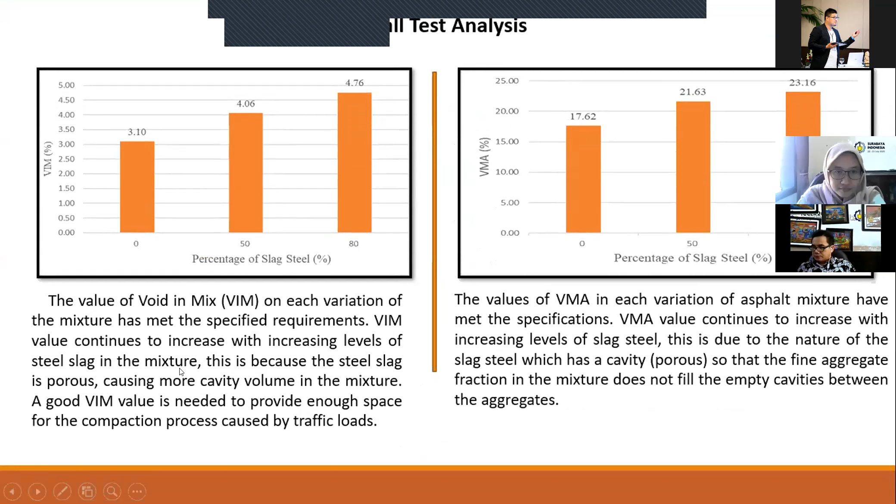The VIM value continues to increase with increasing level of steel slag in the mixture. This is because the steel slag is porous, causing more cavity volume in the mixture. A good VIM value is needed to provide enough space for the compaction process caused by traffic load.

The values of VMA in each variation of asphalt mixture have met the specification. The VMA value continues to increase with increasing level of steel slag. This is due to the nature of the slag.

3 minutes left, Kasa. Okay, ma'am.

Slag steel has a porous cavity so that the fine aggregate fraction in the mixture does not fill the empty cavities between the aggregate.

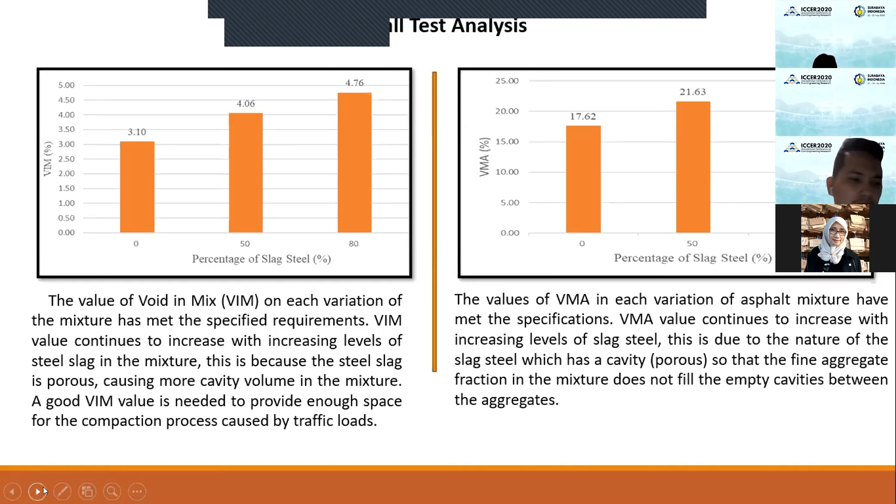Conclusion: testing for the characteristic of slag aggregate values meet the 2018 Bina Marga specification standard, so that slag aggregate can be used as a pavement mixture for flexible pavement layer. The low abrasion value in steel slag aggregate can increase the stability value in the mixture.

The resulting characteristic value for all variations with optimum asphalt content meet the specification. The addition of steel slag aggregate in the mixture results in higher density, VIM, VMA, Marshall Quotient, and stability value. This is caused by the characteristic of the steel slag, which is hollow and irregular in shape, causing good bonding and interlocking.

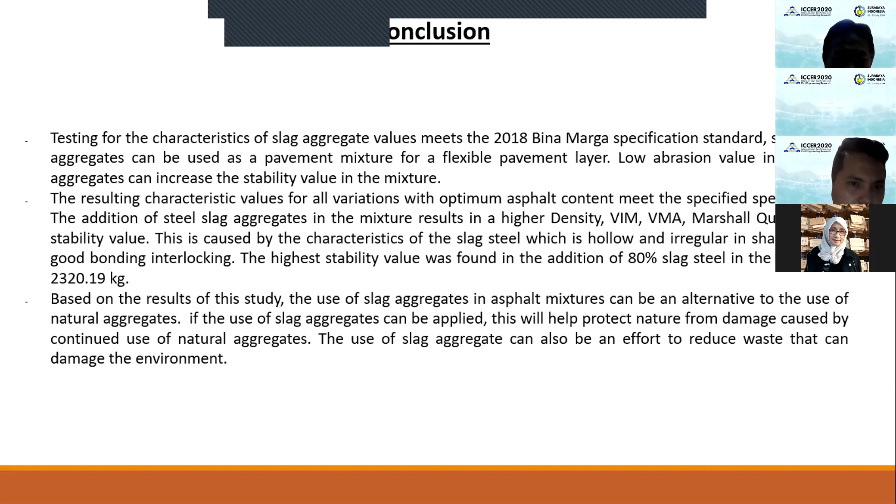Assalamualaikum warahmatullahi wabarakatuh. Waalaikumsalam warahmatullahi wabarakatuh.